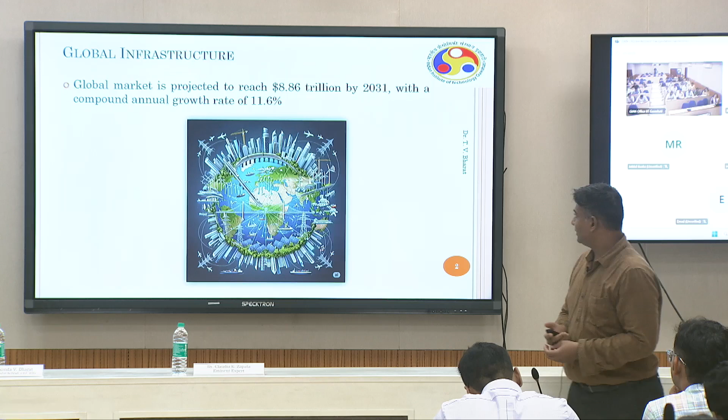So generally, currently, the global infrastructure market is projected to be in high numbers, nearly $8.86 trillion by 2031. So a lot of investment is going on in infrastructure development globally. In India, there is a PM Gati Shakti National Master Plan, where they are trying to connect a number of ports and also expanding the national highways. The same thing is also taking place in Northeast India and many other places. So the road and railway network is developing at a faster pace, and the investment by the government of India is also very high.

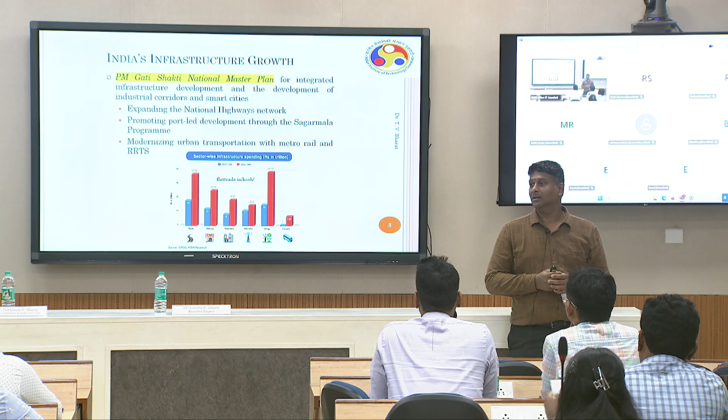Which is very good because the economy is also improving in India, and we have surpassed many countries and we are in third position, right? The fastest growing economy. That is because of the number of projects the government of India is currently engaged in, mostly road projects and Sagarmala; the national highways are getting connected, and the road network is improving even in Northeast India. This is the PM Gati Shakti brief illustration of how different things are getting connected currently. As I mentioned, a high level of infrastructure investment would also boost our economic growth.

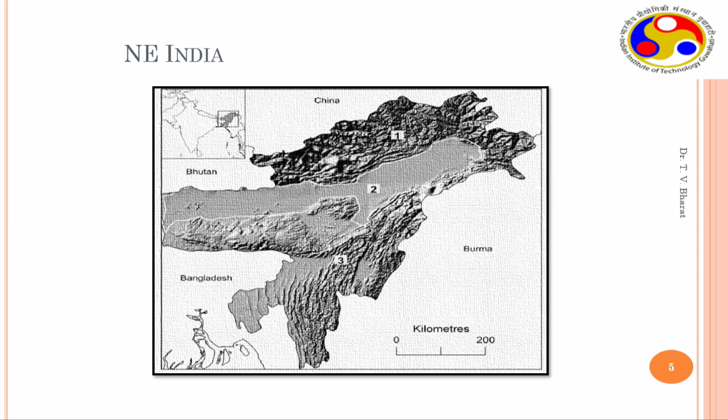Coming to Northeast India, I'm not partial to Northeast India, but I just want to tell what is going on here. You can also think of similar developments in other parts of the country, right? Because of certain geological or geographical conditions, we face a lot of challenges in infrastructure development. Northeast India, you know, is surrounded by other countries like China, Bhutan, Burma, Bangladesh, and if you go to Sikkim, you have Nepal. So the government is emphasizing more developments in Northeast India by investing in infrastructure growth.

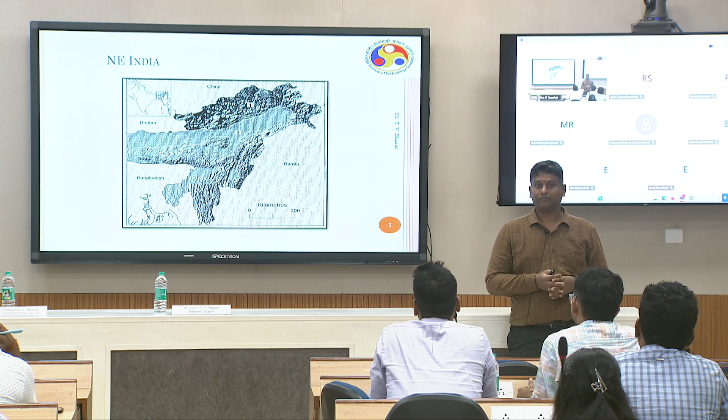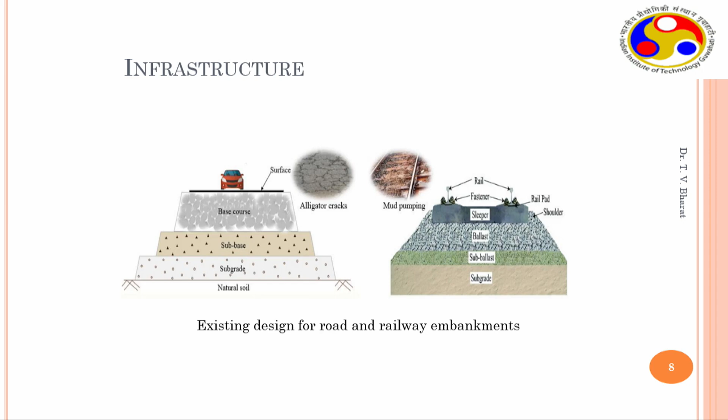There is a SADF package of around 586 crores, and most of that is already released and developments are going on. This is the road and rail network in Northeast India, and generally for a road or railway embankment, we talk about this system. There is subgrade and natural soil at the bottom; as Professor Claudia mentioned, whatever you do, everything has to rest on soil. If soil is good, everything will be taken care of. But if soil is not good, whatever material you put might not be able to withstand the traffic load.

As we start our journey in this infrastructure development, we face a lot of challenges in terms of infrastructure damage and failures, because of the conditions of the soil, climatic conditions, and also human intervention which is not done in an engineered manner, and therefore it caused a lot of damage. I have to mask some of the photos because these were all taken by our research group during travel across different places. And this is from Manipur.

I'm sure some of you might be aware of these particular locations, especially those who are from Manipur, they would know these places. Here the road expansion, the highway expansion, is taking place, and this whole thing collapsed. What you are seeing on the right side sunk into the ground, suddenly disappeared. They simply disappeared.

And this retaining wall, which is there on the right side, somehow it doesn't work here. If I get a stick, that will be better. So this retaining wall tilted, and underneath this retaining wall, even the soil moved to the right side. There is the Imphal river that flows on the right side, and this is where the damage took place.

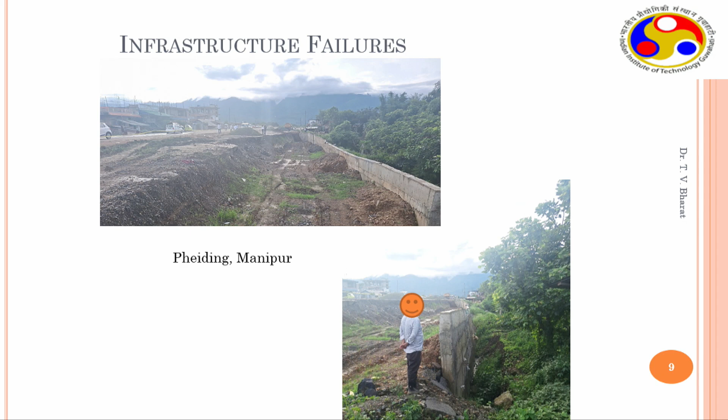Here I will not go in detail into what exactly caused the failure, but I just want to give a glimpse of how the infrastructure damages are taking place and try to convince you how important unsaturated soil mechanics, or the soil behavior, is for these projects.

This is a little up, Manipur, where Imphal is a valley surrounded by hills. If you go slightly up, Jiribam, Imphal region, this is what is happening. On the right side there is the valley side, on the left you have a hill. This is the national highway connecting Manipur and Assam. It is getting expanded, but towards the valley side this whole thing sunk into the ground.

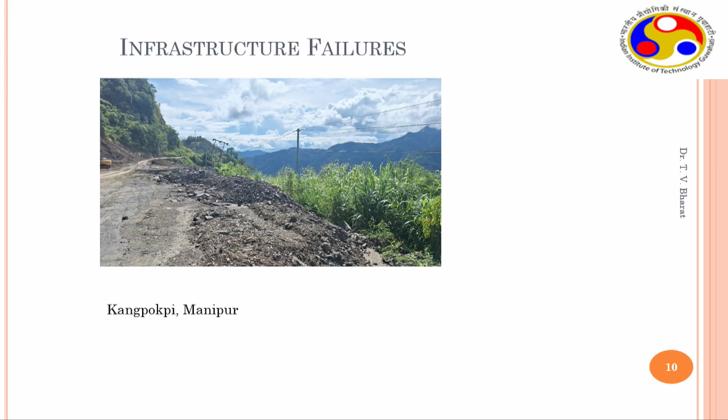This is the condition of the site just a month ago. I was here a month ago, right? Nearly 1.5 meters the soil sunk into the ground towards the valley side. So this hill is full of shales.

Now the shales are all here as mud. Shales are, of course, weak geological material, and sometimes they become red in color when they turn to laterite soils, when exposed to the air, reacting with oxygen, the iron oxide forms and gives a reddish color. Laterites. When it is not exposed, it is black in color. So this black mud is actually flowing all over.

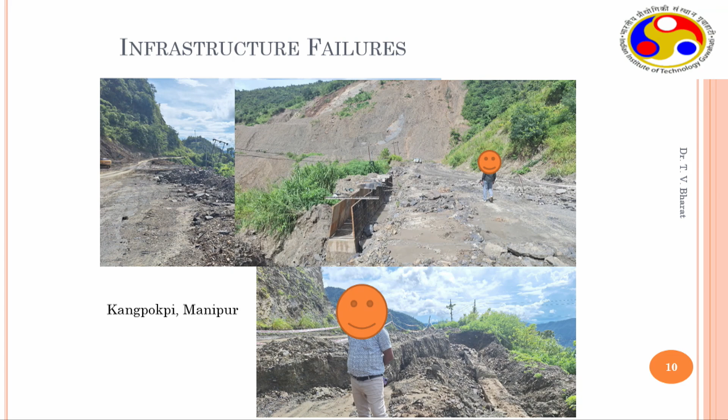That is because of the presence of these shales on the left side, and some activity is also going on here. As you can see, the absence of vegetation indicates some activity on the hillside, which caused a lot of disruption to the natural springs, which are spreading all across and taking away the soil mass towards the valley side. So this is the condition. The unengineered cutting activity taking place all over is causing a lot of damage to the existing infrastructure.

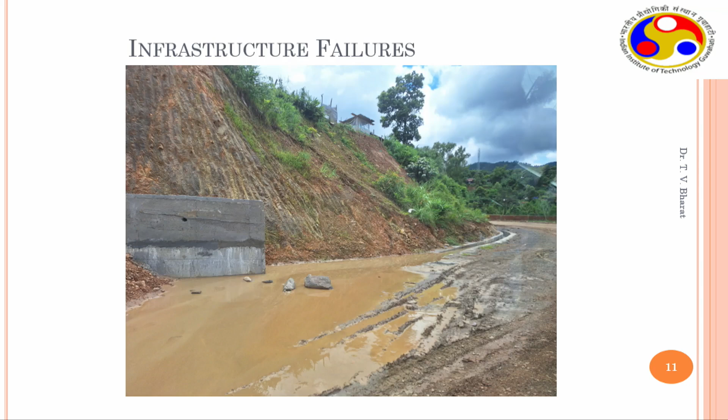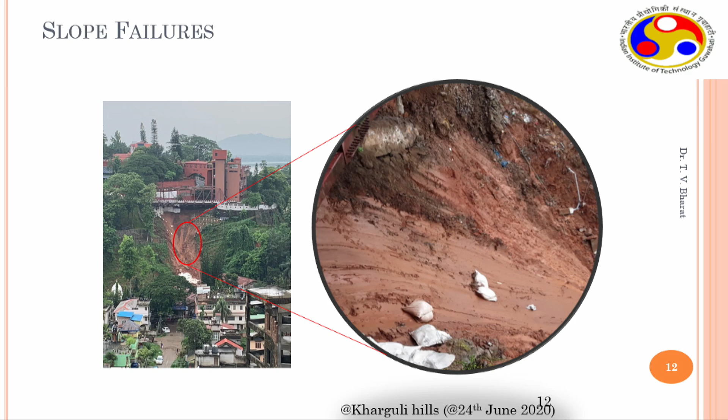This is very close to the IIT campus, called Kharguli, hardly 1 hour. Here also there was a slide. This is simulating mud flow conditions, not exactly a landslide, that took place in 2020, but it continued year after year. Sometimes the damage could be because of rock fall. This is hardly a kilometer away from where we are, just outside IIT.

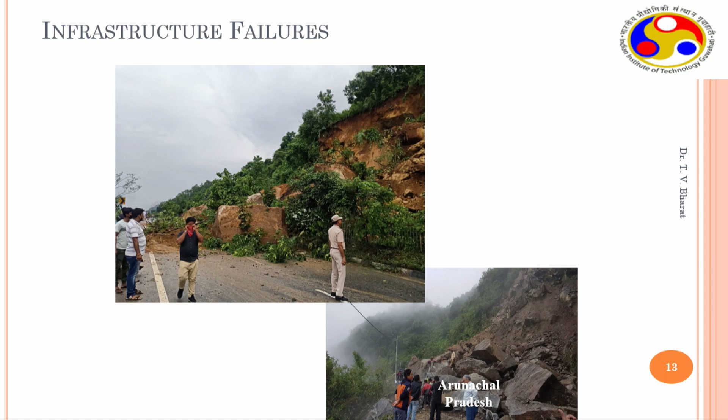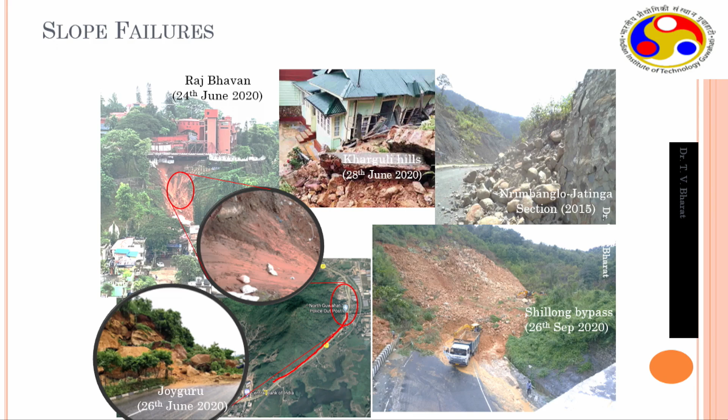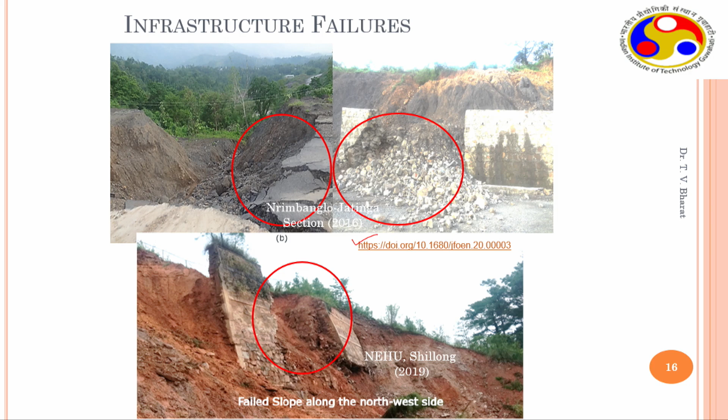During that time, even in Shillong bypass, if you observe the dates, the months, June, September, are very important. I'll get back to you on the significance of these months of failure. This is Shillong bypass, where they were trying to make benches and protect using bamboo. And this is NEHU, 2019, near the sports complex. The breast wall also collapsed here. This is kind of a laterite soil, right?

And these two on the left hand side are West Kameng, Rupa in Arunachal Pradesh, where some hydroelectric project work is going on, and consecutively for 2 years there was a collapse, the tunnel got damaged, and they could not get the proper yield of the electric supply. Actually, this particular hydroelectric project supplies even the government of Arunachal Pradesh.

So this got interrupted, and this particular one is Likabali site, Aalo in Arunachal Pradesh, where this whole hill started moving. On the right hand side, the hill started moving towards the left, and there's a river that is flowing, and where it takes a turn, that's where this whole thing is actually happening.

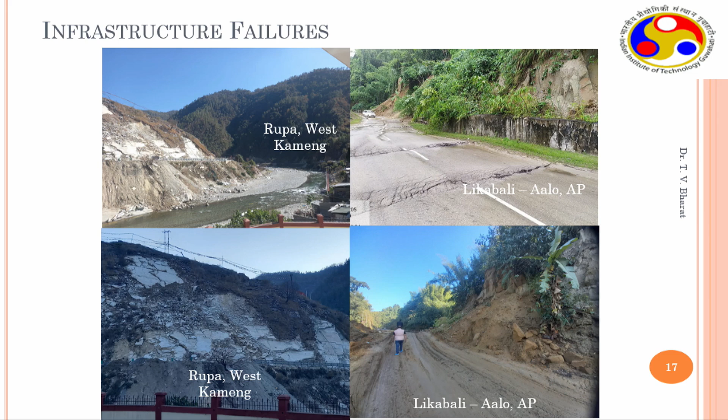Even the bridge that is connecting got uplifted. The bridge abutment got uplifted over here. This is an important road which connects Arunachal Pradesh with Assam, near Dhemaji district, right? So this is what has happened.

And coming to rail networks, this is an awful condition that happened in Haflong in 2022. So far, the scenarios I've shown you mostly happened in the month of June, but this happened in May. Okay, I haven't discussed the rainfall, etc. I'll come to that very soon. So this happened in May. Haflong is one of the districts of Assam, very close from here. Hardly 3 hours by road it takes.

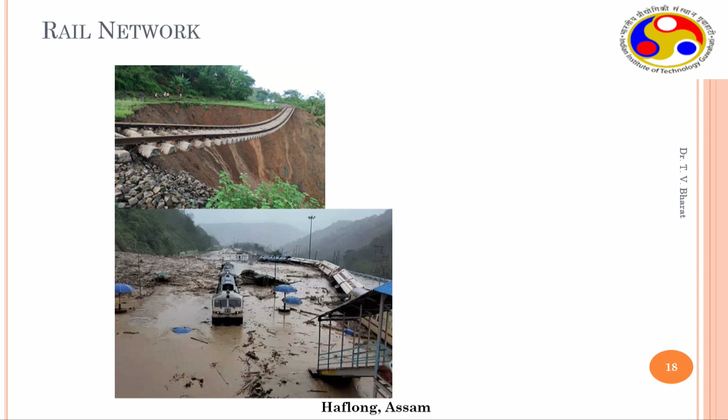Right, so a devastating mud flow has taken place. So this train, the rail you are seeing, is in a valley which is surrounded by 2 hills on the left and right. So the entire flow has taken place from both sides. The left contributed more, and continuous incessant rains caused a lot of flow of the soil mass from the surface to come down and accumulate here, and it completely submerged the train and also tilted the trains. So this is what has happened.

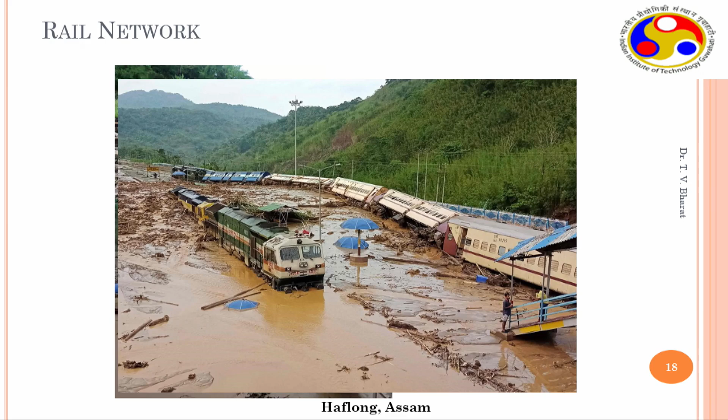And also there are a number of cases where heaving and collapse take place. So this is in Tripura, Agartala railway site, in fact, right where Bangladesh and India had a railway line. An Ircon project actually. There was a PTB, passenger terminal building, planned, with a number of piles for the PTB, a very light structure, but planned with piles. These piles sunk into the ground, some of them upheaved by 1 meter. First time I heard of piles getting upheaved by 1 meter.

So what I could analyze aftermath is that on the right hand side up, if you see, there is a water body, where there is a railway track, where they are actually doing PVDs, prefabricated vertical drains, to stabilize the soil after the development of the PTB. Okay, so the PTB itself is located on very soft ground. Because it is very soft, they actually designed piles. Some of the piles sunk, but later on they added a few more piles.

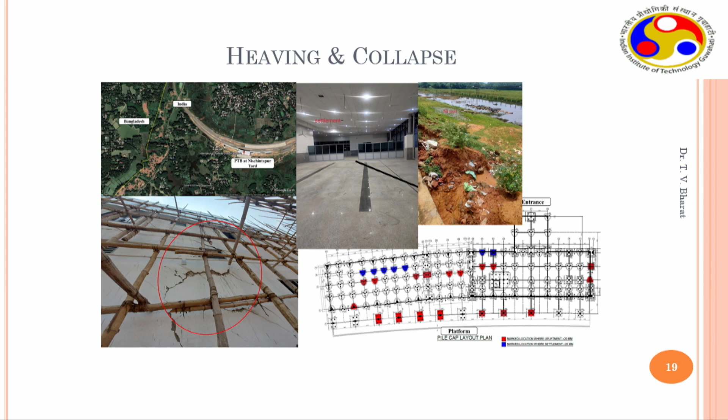Now everything is designed next to the PTB building, the site they were developing during that time. So the whole soil mass was sinking because of accelerated consolidation. This soil mass started pushing the soil to the left side, so some of the piles got upheaved. So this is the problem that happened, and so you have pretty soft soil in places like Tripura, and also shales, sandstones, claystones in many parts of Assam, Meghalaya, Arunachal Pradesh, and this variety of geology is present all across, which can replicate the entire India, I believe.

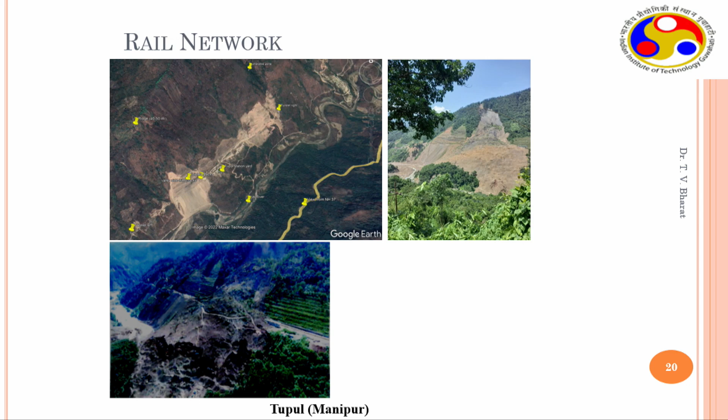Right, so there is another case which is quite interesting to me and quite challenging. So this is in Manipur, Tupul. This is a real tragedy, 61 people died when this particular landslide took place. Again in 2022, I believe, on June 30th, when the railway yard was getting developed. There is a tunnel. Yeah, you can see the tunnel portal. From there the rail is supposed to come and stop over here, and then again it enters another tunnel. So this is just a yard, a railway station.

Right, so for making this railway yard, they were making benches, and you can see that this is the geology. You can see the dip very clearly, and this is again a combination of sandstone and shales. So that's the layer that is actually present. And when they were making the benches, one fine day, everything gave up.

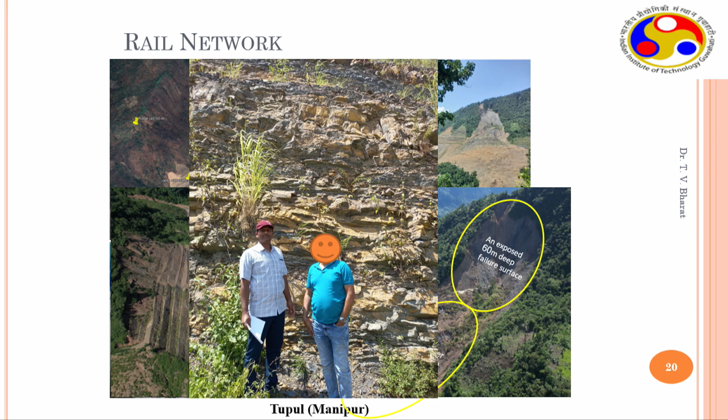The important thing is, if you see the numbers, this is the Ijai river flowing downstream, and the top of the mountain is nearly 1 kilometer up from the Ijai river. That is huge, nearly 1000 meters elevation, right? So doing a total station survey, anything is very difficult, right? So that is the challenge, and typically rainfall induced landslides are shallow in nature, hardly 2 meters or so, right?

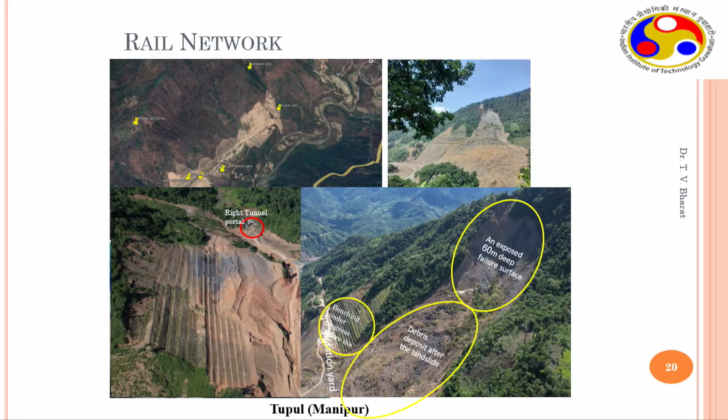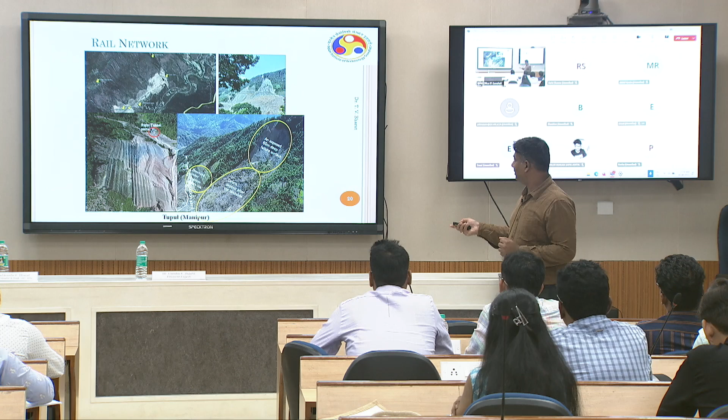But here the slip plane itself is 60 meters deep because of continuous rains, for sure. But there are a lot of lineaments that were present, and also this is zone 5, seismic zone 5, right? So because of the earthquakes that took place nearly 8-9 years previously, that caused a lot of development of the lineaments and a lot of fault zones through which I think it slid. So this is a failure in Manipur, and similarly the railway network, if we talk about it, faced similar problems.

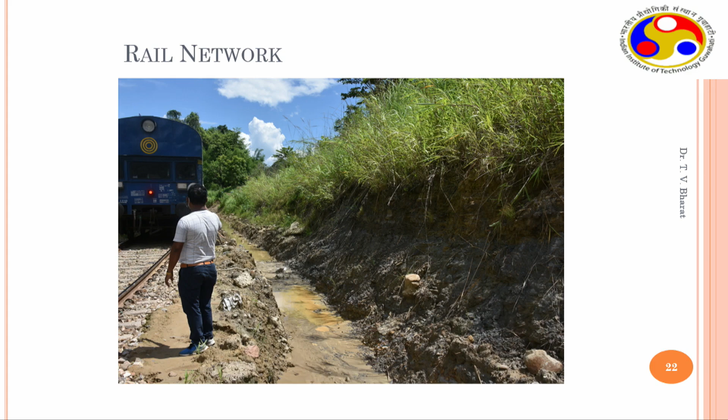So this actually causes a lot of pore pressure to develop, very high pore pressures. We can't even imagine how much pore pressure really gets developed. So it can push the gabion wall, huge gabion walls. It can push. Generally, we think that gabion walls are very useful because they have a lot of porous material in between, a porous structure, and it can allow free water to drain. But then it can get choked, and the same pore water pressure, soil pressure can push the gabion walls.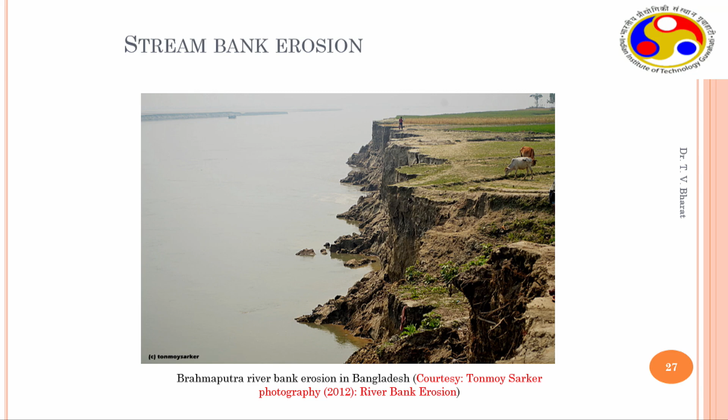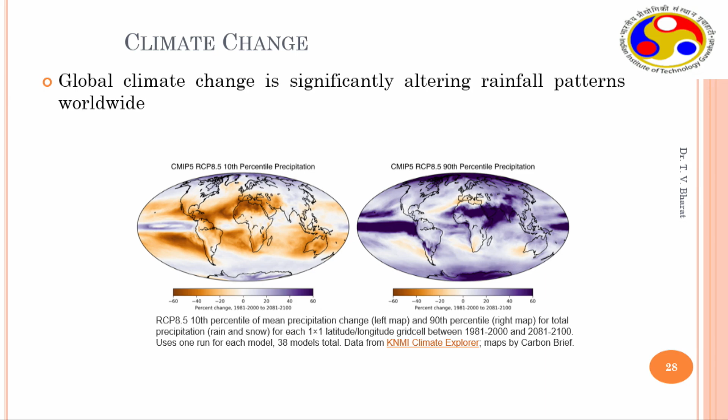Similarly, we have stream bank erosion because we are all on the banks of the Brahmaputra, which is a very long network, and so we have continuous erosion of these banks that is also taking place. So what could be the reason for the failures? We can always blame climate, right? Partially that is true, but our understanding of soil behavior is also important. If that understanding is not there, the failure is inevitable, right?

So currently, because of the climatic conditions, what they say is that the temperatures are slightly increasing. Because of that, the evaporation is increasing, and the randomness or variability in the rainfall is also increasing. So we have something called a return period. So there is a particular rainfall intensity which returns after a certain duration. This is getting disrupted. So for example, there is a particular rainfall that happened in 2022 in the Haflong area, which caused a mud flow. Similar rainfall intensity may not happen every year. It may return after 50 years or 60 years, but that gets changed because of the climatic conditions. It may happen that within 20 years it will return, right?

So our infrastructure should be ready or good enough to take care of these return periods. That is called disaster resilient infrastructure, right? Which is adapting to the changing climatic conditions. The second one is that the infrastructure we are putting in should be sustainable. It should be economical and at the same time environmentally friendly. So that is another aspect they're talking about. Sometimes geosynthetics are thought to be sustainable because they can keep the infrastructure intact for a longer period of time. You don't need to reinvest in the infrastructure repeatedly, therefore that is considered to be sustainable.

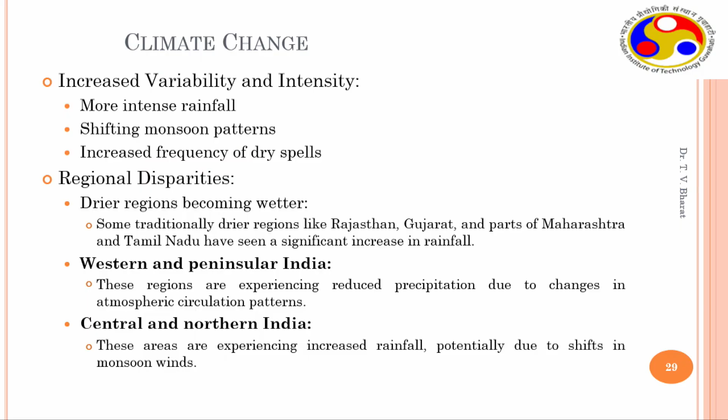From others' thought, again you are using plastic material, right? Polystyrene, polyester, high density polyethylene materials, etc. So geonaturals are considered more sustainable. So both things are there, but if you are investing in geonaturals, again they have to be revisited. But there are other ways to coat them and then place them for a longer period. That's another way we are trying to address it. So the variability in rainfall, etc., that climate resilient thing is actually coming in there. Also, concentrated larger intensity rainfall is taking place at one place, which can also cause a lot of damage.

So coming to the climatic changes, before that let us understand the geography or geology of this particular region itself. The location of this particular thing, Northeast India, which has a lot of mountains all around. Even the campus is surrounded by several mountains, right? Although we are in a valley, this is the Assam Valley, and a number of mountains surround it, but it has a weak geology and high rainfall.

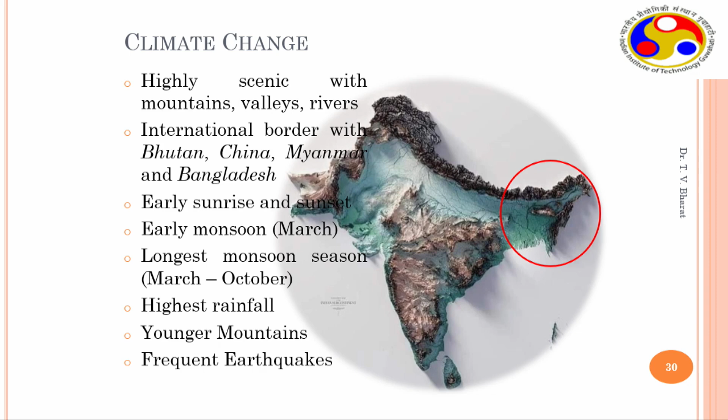So the highest rainfall place is hardly any distance from here, and it is a high seismic zone. So these are all contributing to the damages that we are discussing about. And one particular scenario which I asked Vishnu to prepare yesterday: the rainfall patterns in Northeast India. So the pattern, if you see, they are increasing every year.

So another aspect, if you see the rainfall that has happened in Haflong in the second picture during 2020. So if you see, generally April, May, it's a very pleasant time here because we have a pre-monsoon. The actual monsoon is supposed to start from June onwards, which is called the southwest monsoon. The southwest winds come here, and the southwest monsoon starts nearly in the third week of June, June 21st, 22nd, sometime then it starts.

It originates from Kerala. In Kerala it starts around the first week of June, then the Western Ghats, and comes here around the third week of June. So most of the landslides you see have occurred during June, July, August, September. Until then, you have rainfall. Then it retreats, and rainfall starts in the southern part, which is called northeast rainfall. Northeastern winds move towards that. Like Chennai, it rains in November, December. Right? So that is the general pattern here.

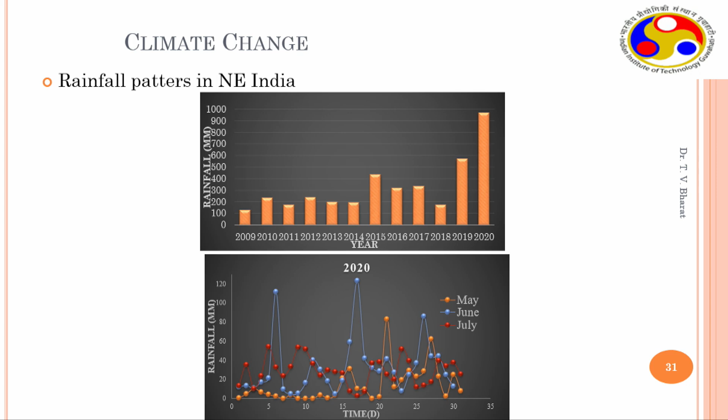So this variability, sometimes pre-monsoon starts a little early, sometimes a little late, which can disrupt these things. And sometimes the intensity increases. These are all causing a lot of damage, so therefore, understanding of these things is very important.

So in the northeastern part, mostly shales you will see everywhere, right? Maybe once you go to Arunachal Pradesh, you will get to see graphite schist, and other things, and other places mostly shales. Gneisses also you have, and these things are very common in different places, right? In northeast India, mica schist is also present in Rupa and other places.

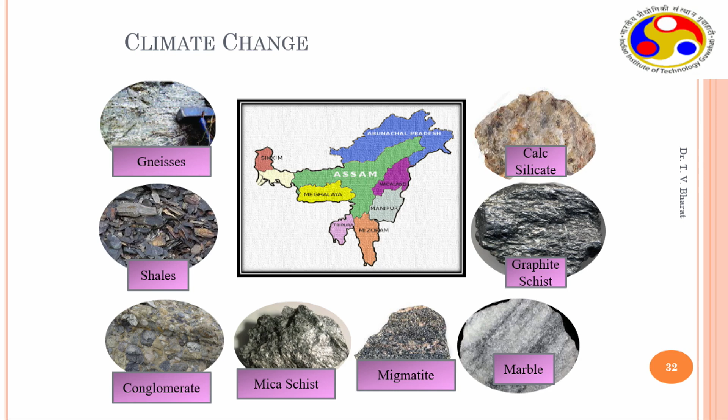So I was just mentioning what we are talking about in climate resilient infrastructure. You may have a retaining wall, something called a crib wall, which is placed there, and you may have nails or anchors, SD anchors or something like that, and also sometimes along with some bioengineering, where we are currently working on how to arrest mud flow scenarios, etc. Certain bioengineering techniques, certain grass varieties to prevent mud flow or even shallow landslides from taking place, right? So these are other climate resilient infrastructure developments we are thinking of.

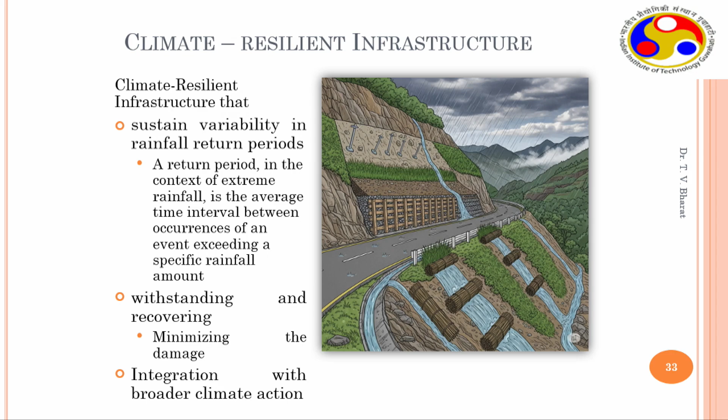So what we should discuss about: some applications of GIS and remote sensing I'll try to discuss, because first of all we need to assess the damage and assess the conditions of the site to even recommend certain solutions, right?

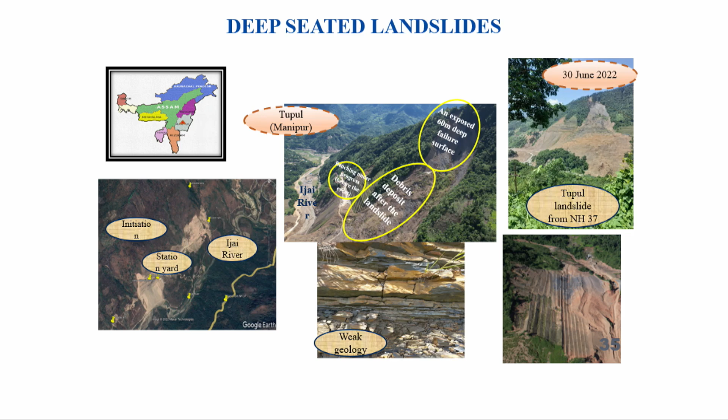So for example, as I mentioned, the Tupul landslide in Manipur is a large area, nearly 1 kilometer from the Ijai river to the top of the mountain. So a TS, total station survey, is nearly impossible there, right? So then some of these GIS or satellite based methods are handy to understand what is going on there.

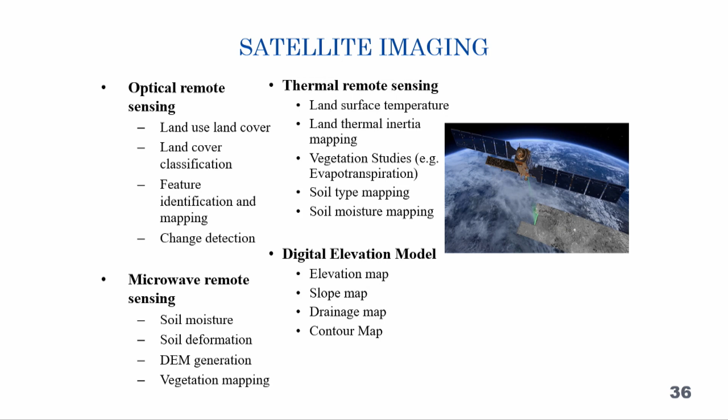So some of my students are working with either optical, thermal remote sensing, digital elevation, or microwave remote sensing models. Optical remote sensing data is good, but in Northeast India we have the cloud coverage problem where you will not get good images. So we rely on microwave data for such cases, right?

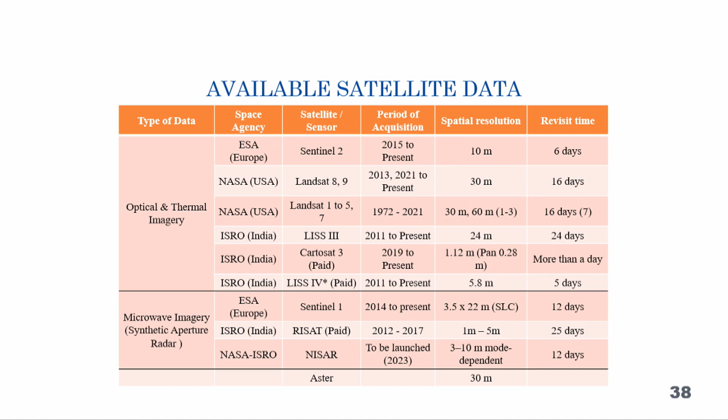So they work with different frequencies, and these are some of the sources where we get the data from. These are freely available sources where you can download the satellite images and then see what is going on. A lot of processing of course is involved. SAR, synthetic aperture radar, is also used, and I'll skip these things.

I'll directly go to how the analysis is actually made. In this lecture I just want to tell you the different options we have available and how they could be used and integrated together to solve a problem. So this is for the same Tupul site.

If you see the data, nearly 2 years before the landslide there is movement taking place. Because it can capture even millimeter changes at the site, it is possible to recognize what changes are happening. On a large site, there is continuous movement taking place.

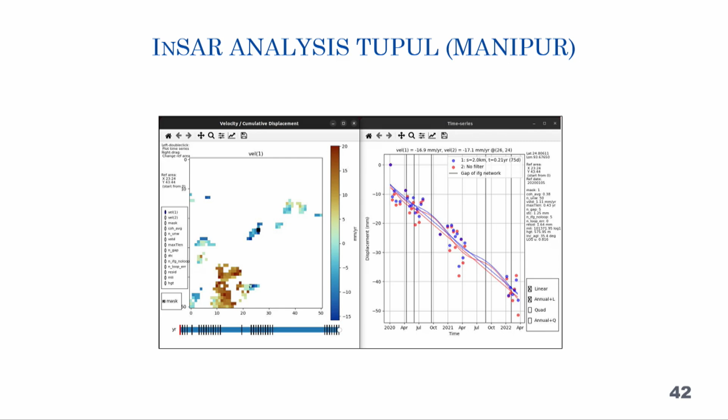For example, if you are doing a direct shear box test, you use a certain shear rate or strain rate, but you keep continuously shearing and it will start failing at some place, right? The same thing happens in the field. Part of a large hill moves slowly and gives up some other time. The strain is developing within the soil, and for a large place that can only be detected remotely. Otherwise, it is not possible, right?

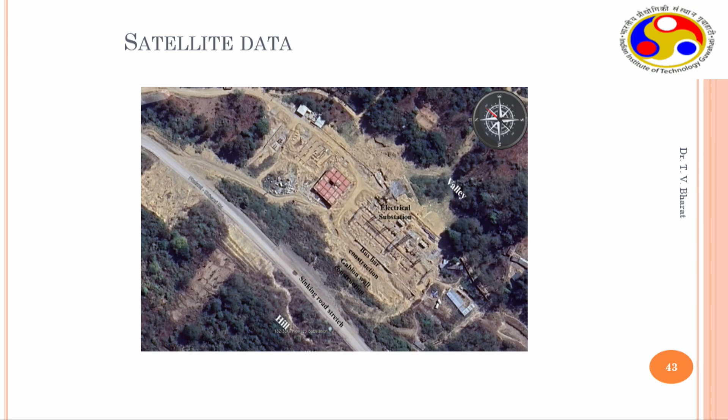Similarly, this is close to Dhanesh's place. This is Phutsero, Phek district in Nagaland. There is a lot of damage on the valley side. This is the hillside on the left down, and the right is the valley side. An electric station is going to be built there. It is partly built, but after that a failure happened.

So look, I forgot to mask the faces. Apologies.

There's a shear plane. This is where the shear plane developed and it is actually moving down. If you see the pole, it nearly got shifted by 1.5 meters from left to right. On the left side picture, there are 2 yellow arrows, right? So this pole got shifted and is going down. Continuous failure is happening at this particular place.

I visited the site nearly 1.5 years ago along with Dhanesh, and currently it's in a different shape altogether because 3-4 landslides took place during this duration. Look at the gabion wall's condition. The gabion wall even got pushed. That's the amount of pressure that gets generated. Soil exerts a huge pressure, right?

So this is a bus bar for the electric station, and these are the retaining wall failures. Here, this kind of picture would really help. For that, you need a total station survey and a contour map, generated using lidar, total station survey, or sometimes DEM, digital elevation models. But DEM would be difficult unless you get a recent one.

Once you have this profile, you can place what each bench has and understand what is actually happening. The next thing is borehole data or some geophysical data. Geophysical data should also have some ground truth like boreholes. Then you combine these two and map them together so that you understand how the layering is changing, and where it is actually failing.

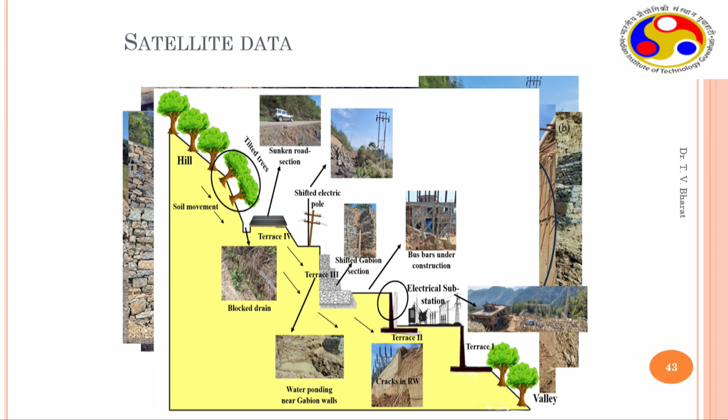You also require a drainage map. The drainage map of this location helps show how the flow moves, which is essentially what is taking the soil away. For this we developed the DEM, digital elevation model. Through that the flow channels were understood, the drainage map was developed, and most of the flow is taking place through that particular site.

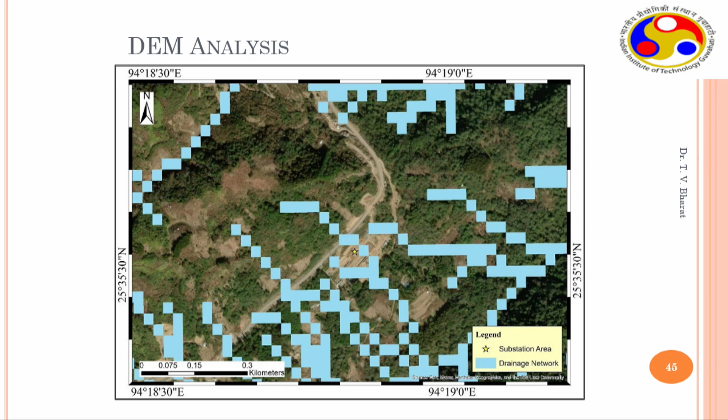If they had chosen some other site beyond this, it would have been safer. So this planning should come beforehand. If you are planning an important site, that should come first, right? So that's how some of these satellite or remote sensing models would really help.

And briefly, I'll touch upon what is the mechanism for the general failures. So definitely one cause is the water. Water has to be channelized, right? So you may have a lot of springs or rainfall water which is actually coming down, that has to be channelized and it should go to the valley. And if you don't pay attention, it will take the soil also along with it, right?

Very quickly, I want to mention. So we always say that the angle of repose, when you take a dry soil mass and then try to dump, it takes a shape, right? Heap. That heap angle, if you measure, that is angle of repose, which will be angle of internal friction as well. If you take a dry sandy soil mass, if you don't believe in cohesion, then even for clay soils, this is the same. So there are different schools of thought, British school of thought and American school of thought. So British school of thought doesn't believe in cohesion at all.

So anyway, whether you believe in it or not, if you take a sandy soil, definitely there is a friction angle, angle of internal friction, which is equal to the angle of repose. So that means any given dry soil mass can be stable with this angle of repose. How much can this angle of repose be? Our angle of internal friction of a soil could be less than 40 degrees. So any slope can be stable with 40 degrees. But you may see that even sand, this Ganesha thing that was made, part of it is even 90 degrees vertical. How is this possible?

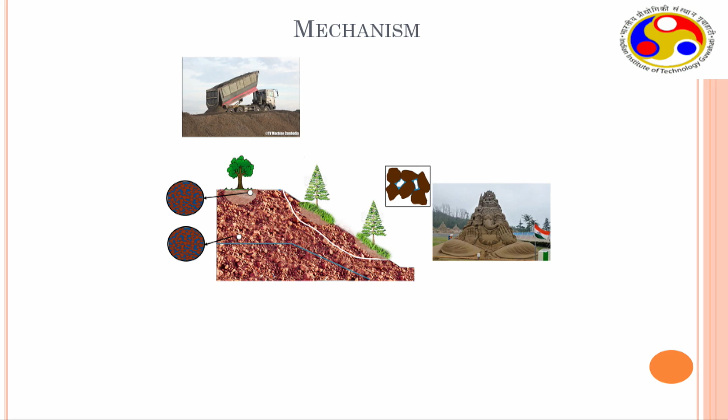This is possible because of surface tension. Partly saturated soil, unsaturated soil mass. When the soil is partly saturated, there is a development of surface tension. There are capillary forces, there are adsorption forces for some soils. There's a matric or the osmotic potential which actually translates to negative pore water pressure under unsaturated conditions. These conditions make the soil stable even more than its angle of repose.

So most of the soils or slopes are intact because of this reason, also because of presence of some vegetation. The roots etc. impart some cohesion and also give some reinforcement. Because of that, they are stable. But when the rainfall comes, it wets, right? As the saturation takes place, the shear strength drops back to the same as what you see in the dry or completely wet conditions. So it fails. So essentially that is what is actually making it fail.

So when you have a slope, you create a road. I'm not able to show it, but then there's a road, right? Generally you will have a breast wall here, retaining wall there, and then whatever backfill you use, and you go on, right? But unless the water, subsurface and surface water, is properly drained out and channeled towards the valley, it can take your retaining walls also along with it towards the valley.

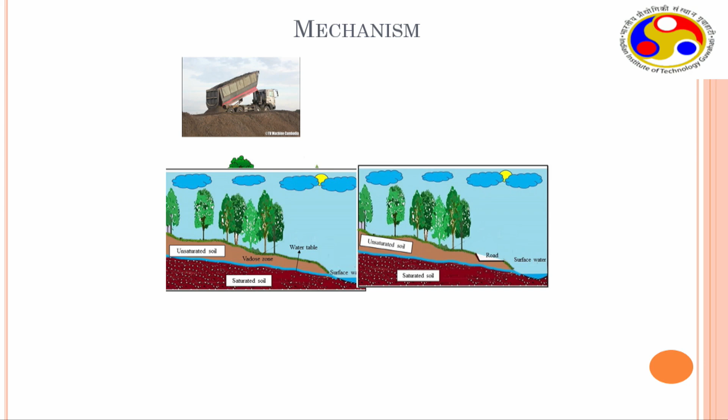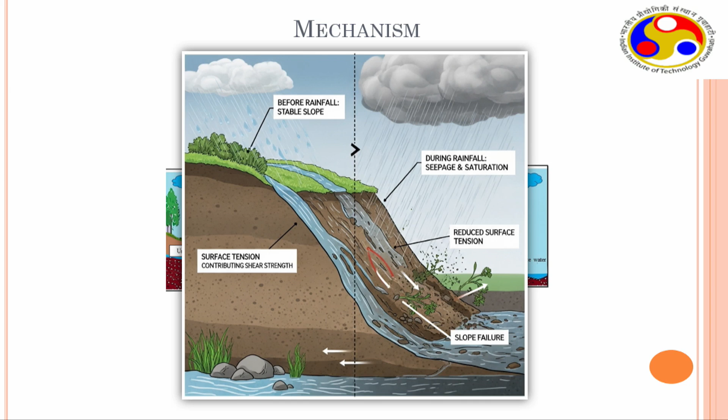So this is what can happen. So we understand that there are different shear strengths. Shear strength can vary with moisture, right? So how the shear strength can vary with moisture, how the soil moisture can change its hydraulic characteristics, all those things are very, very important, fundamental to understanding and addressing these things, right? So essentially there are different mechanisms, of course. What I showed you is only one mechanism.

There is rockfall. So rockfall also takes place, very common in Nagaland, right? Sikkim. Nagaland, last year it happened and this year also it happened, between Dimapur and Kohima, that road. So people died, suddenly, with no breathing time, suddenly it drops on your head, right? From nowhere. And after that, they had rock bolting and passive nets. But still, this happened this year. So you have to calculate the energy, and based on that, redesigning is required, right?

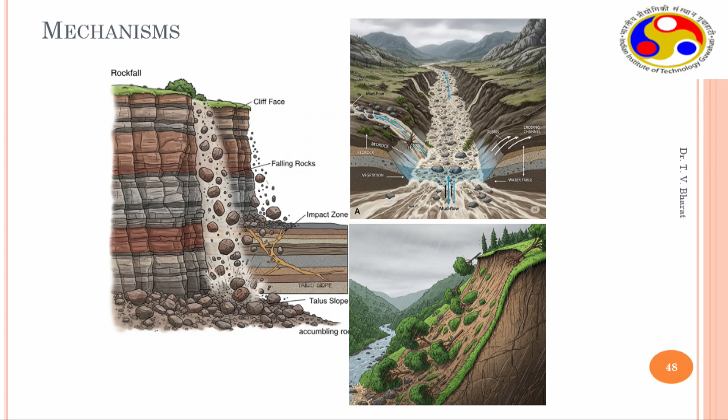So similarly, mud flow, very common in Sikkim. This year also it happened 2 months ago. So mud flow is very, very common, and landslides are very common in all different parts of the northeast and north, and similarly in the south in Kerala, and also in the Western Ghats, say Maharashtra and other places. So we are all getting affected, right? So this particular problem is not an isolated problem in India, right? Similarly outside also. Japan faces the same problem and many other countries face the same problem. So for mud flow, there are a number of solutions like Sabo dam, etc. For that again, understanding how the flow initiates and takes place is important.